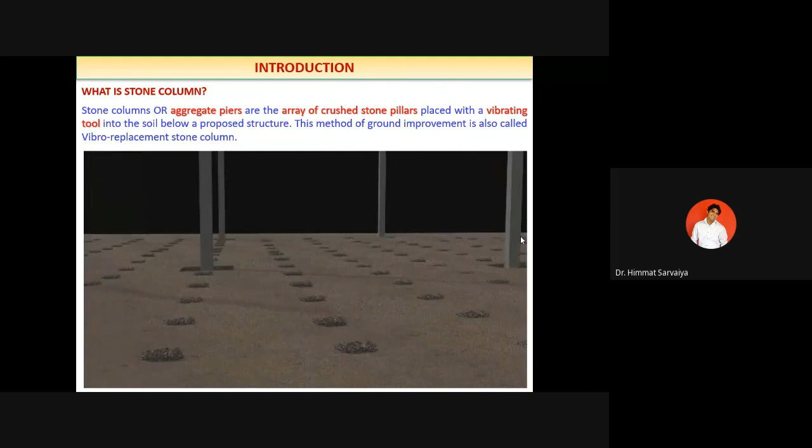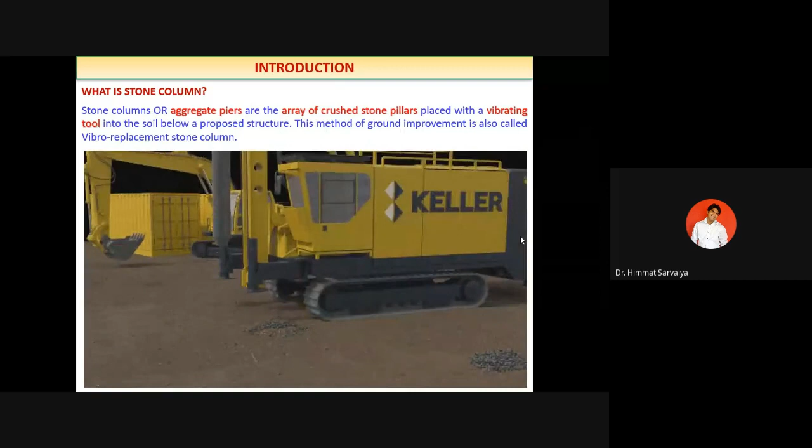So talking about this technique, basic overview, as you see in the graphical presentation, a stone column is an aggregate pier. Aggregate means whatever we use in reinforcement work, that is aggregate of 20 mm to 40 mm size. So a stone column is an aggregate pier or array of crushed stone pillars placed with vibratory tools. As you can see in this picture, the aggregate is placed with the vibrating tool below the soil surface.

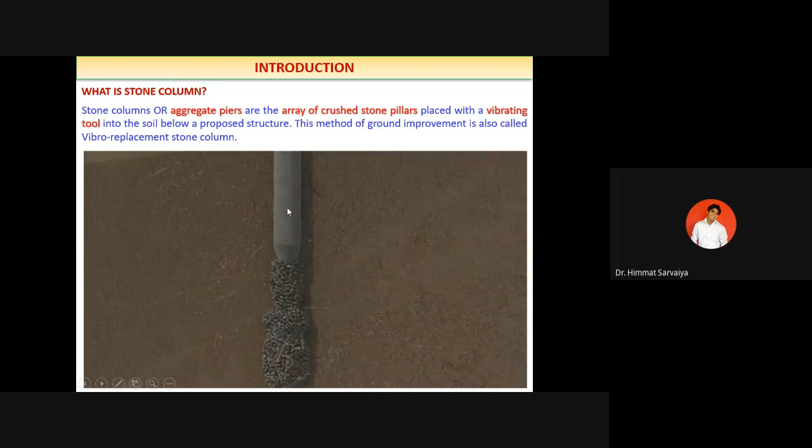This method is also called ground improvement by vibro replacement stone column. Vibro is this instrument attached here; this vibratory probe is called the vibro. So this technique is very useful for certain civil engineering structures for rapid construction work. We will see later on some of the case studies where this technique can be applied. Okay.

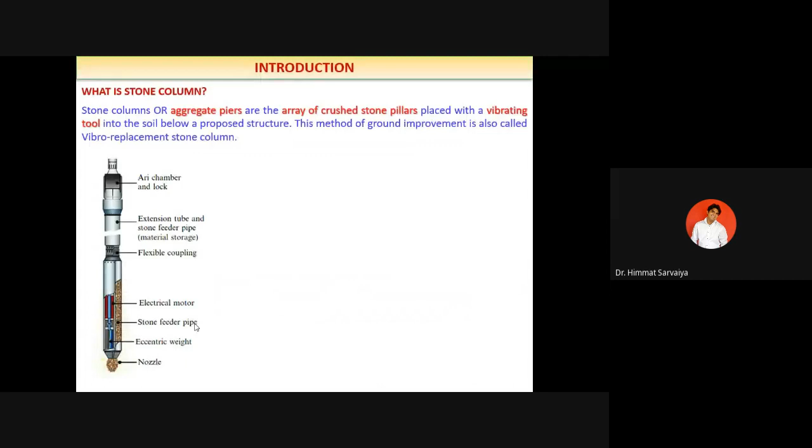As this technique is an aggregate pier, we have to put stone aggregate inside the ground. This can be achieved by certain means that we will discuss, but here you can see the step-by-step procedure. How can we construct a stone column at site?

First, the graphical representation. Here you can see a vibratory probe, called a vibro. There are certain types of probe available in the market, but here in the picture you can see the aggregate also transfers from top to bottom through the vibro probe. There are certain holes through which you can transfer material, aggregate as well as water. You can also transfer it by pressurized means.

So the first step for creating a stone column is to create a bore hole, by means of this vibratory probe or some other means. We will explain in the next slide how you can prepare the bore for this stone column. So the first step is to create a bore hole. Then the second step is to transmit or feed the aggregate.

So there are certain methods, whether you feed the aggregate at the bottom of the vibrofloat or from the top of the vibrofloat. We can see the different methods later on. But this is the technique: first you create the bore, then feed the aggregate, and then compact the aggregate by the vibrofloat, just lifting the vibrofloat and impacting that aggregate so that compaction can happen, and then the finishing layer.

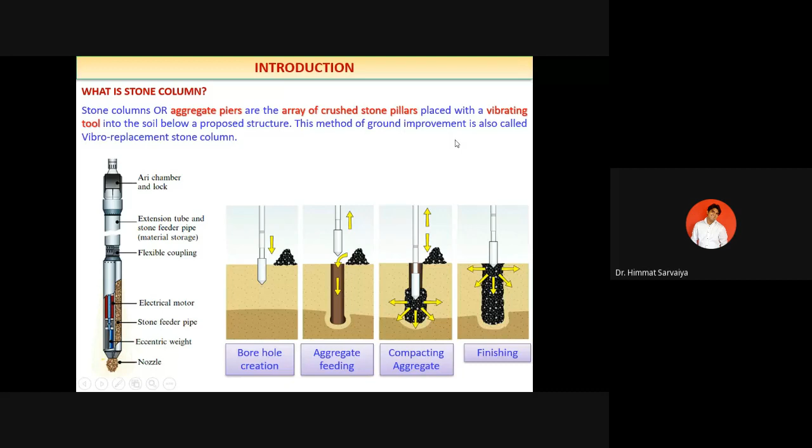Right, this is the basic technique. This is the bottom feed technique. We will see what the types of technique are later on, but this is the basic technique by which we can create the aggregate pier or stone column at site. There are huge instruments and accessories available with Keller and other companies that we will discuss later.

For preparing a stone column, we need to excavate, we need to create a bore at site. That bore we can create by two means. First, by injecting water into the ground, turning the soil into slurry and flushing it out from the hole. That means a vibratory probe having a water jet at the bottom; we have to vibrate the vibrofloat, meanwhile allowing the water jet to loosen the soil. Whatever soil is loosened will come out at the top.

It is made by the Keller Company. The vibrofloat technique was made by the Keller Company in 1930. Since then, for almost 80 years, we have been using this technique, in India also. This company is working in India, creating very massive structures, which we'll discuss in case studies also. So here you can see actual pictures of the vibrofloat.

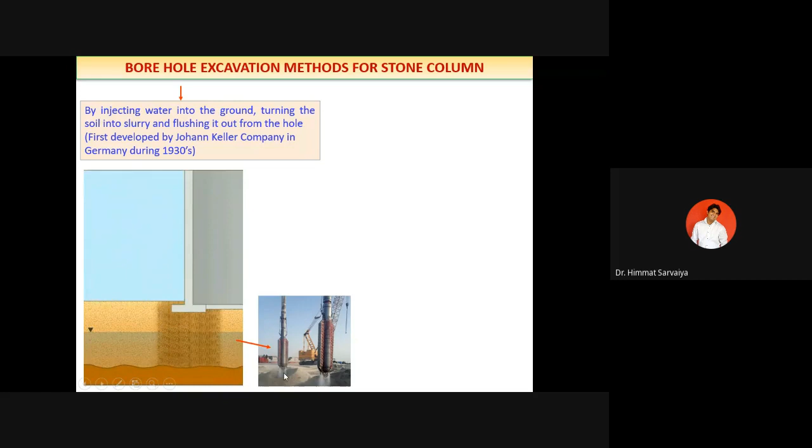We have to create the boreholes at different spacing. What spacing we should maintain, we'll discuss. But here you can see two vibrofloats excavating the bore. Here you can see the jet at the bottom. The jet will help to loosen the ground. Different techniques are used for different types of soil, which we'll discuss, but here the specific type of soil is clay or silt. So for clay and silty soil you can use the vibrofloat.

Another method for creating a borehole is by drilling a hole into the ground with drilling accessories. In that technique, we first create a borehole by drilling accessories and then feed the aggregate. So both ways we can create the stone column and rest our structural load, the civil engineering structure, over this soil. The basic principle is to increase the density of the soil and to increase the permeability capacity, so that liquefaction or other parameters damaging our structure can be neglected.

So talking about these two techniques, borehole creation by vibrofloat and by the auger. There are different types of auger that you are already aware of. With any auger, mechanical or manual, you can create a borehole, then feed the stone into the ground up to the required depth. So we can create the borehole likewise.

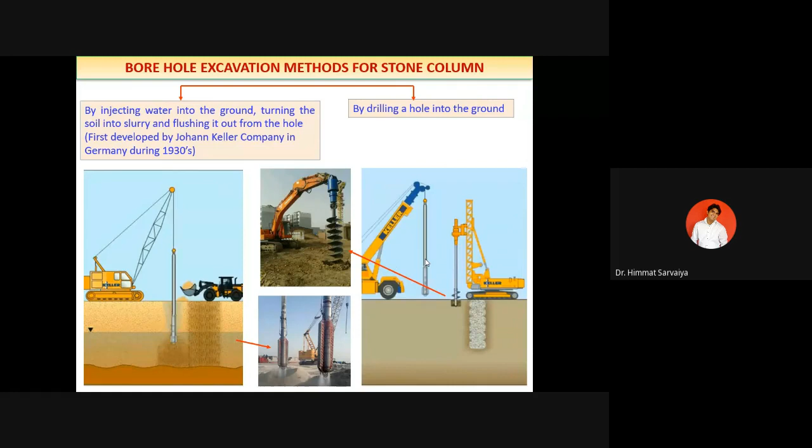So the basic principle of vibro compaction stone column is to increase the density of the ground by entering some non-cohesive material. Non-cohesive material is very good in the bearing capacity aspect. That material is aggregate, gravel or stone, crushed stone, which we can add to the borehole and compact. So ultimately the capacity of our ground will increase by increasing the density of the soil.

So with the vibratory probe, what happens? The ground will shake. Whatever area surrounds the vibrofloat is shaken, so repacking of soil particles will happen. The permeability coefficient will reduce, and meanwhile density also increases for equal volume. This is the basic principle: we create a borehole, increasing the density of soil, so the bearing capacity is increased. How much bearing capacity increases, we'll see from later research papers.

So what happens by creating such a stone column? You can increase bearing capacity, increase density, decrease settlement, provide lateral stability, increase resistance to liquefaction. These are the advantages we will discuss later on, how the bearing capacity of soil is increased.

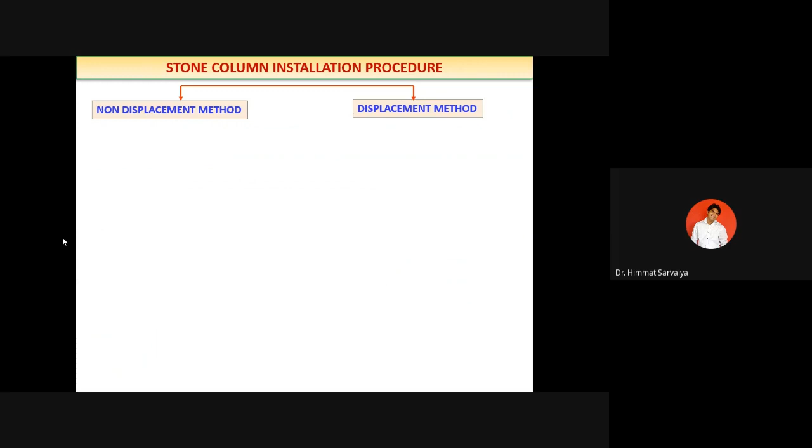Now let's talk about the different methodology used in the field, how we can create the stone column. There are two main categories: non-displacement method and displacement method. In the non-displacement method, we have to create a borehole, then feed the aggregate and then compact. Here soil is not displaced, that means we create the borehole, the soil is removed from the borehole, then we feed the aggregate. So this is called the non-displacement method.

It is also called bored rammed. Bored rammed means we create a bore, feed aggregate and ram the aggregate, enlarging the area, so the bearing capacity will increase. This is the non-displacement method.

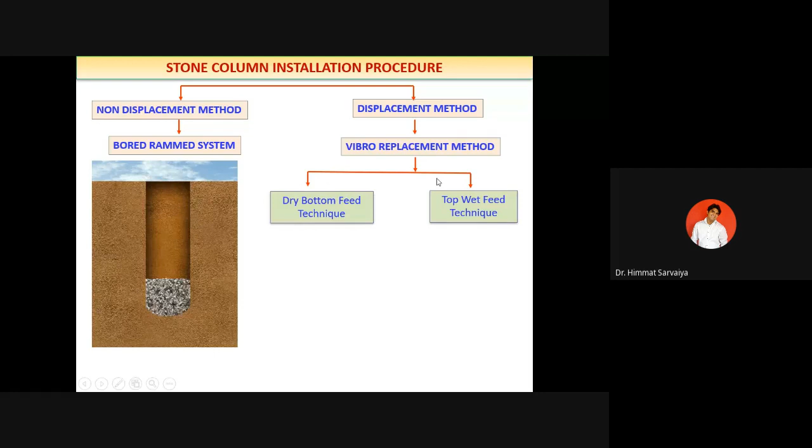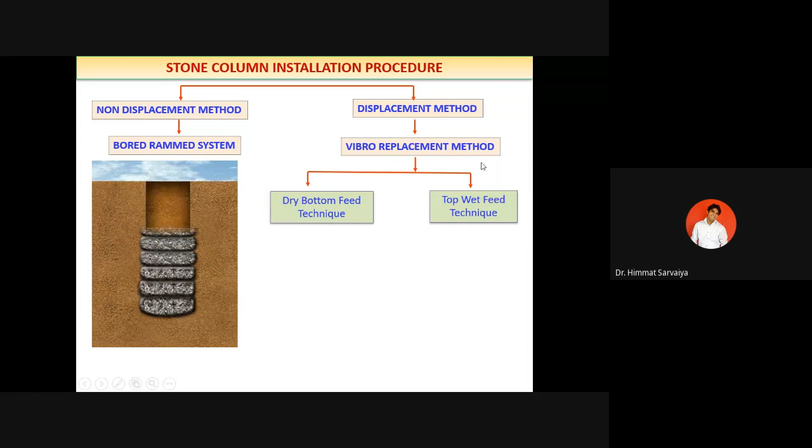The other method is the displacement method, also called the Vibro replacement method. In that there are two categories: dry bottom feed technique and top wet feed technique. What these techniques mean, we will discuss in the next slide. In Vibro replacement, there are two techniques: dry bottom feed and top wet feed. What is dry bottom feed and top wet feed?

Here you can see the picture: top wet feed system. That means we are allowing aggregate from the top of the surface. Here you can see the vibratory probe creating the borehole, and we are allowing aggregate from the top. How does the aggregate travel to the bottom? By the vibratory effect, as well as gravity action, as well as settling property.

Because this vibroprobe has a water jet at the bottom, and some vibrofloats also have water jets surrounding the vibrofloat, creating the borehole is much easier with the vibrofloat. Then we feed the aggregate from the top of the surface. This is how we create the stone column. So this is called top wet feed.

Why top wet feed? Top means we are allowing aggregate to reach the bottom from the top. We are feeding aggregate from the top. Water jetting helps that aggregate reach the required depth by vibratory action. So for a clean stone column, the clay or cohesive material will wash out at the top during the vibrofloat borehole creation.

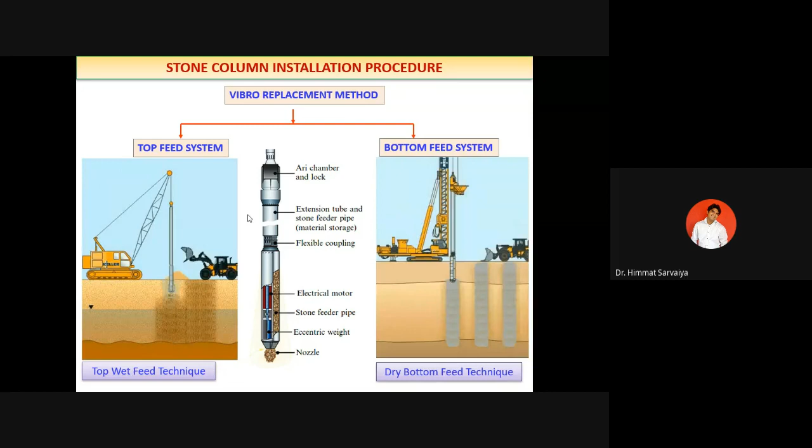So this technique nowadays is an automatic technique. You can measure the depth of the stone column or the diameter of the stone column or the density of the material, right? Each and every parameter you can measure inside the truck by an automatic measuring system. Here you can see, right? It is attached inside the cabin.

Whatever depth you achieve, what the density is, what improvement is achieved, what volume of aggregate is fed till now, all those dynamic parameters you can measure from inside the truck. So it is a very rapid technique. All parameters are measured, even the bearing capacity, how much the ground is improved, that you can also measure inside the cabin dynamically, right? So this technique is very versatile.

Now in foreign countries it is also used. In India also, Keller company is very aggressive, working on large projects, government projects and semi-government projects. Keller is used for ground improvement techniques, right?

Now let's talk about the factors influencing the design of stone columns. What are the diameter, the size, which factors are affecting the stone column technique, we can discuss: soil type. First of all, soil type is a very important parameter in constructing stone columns.

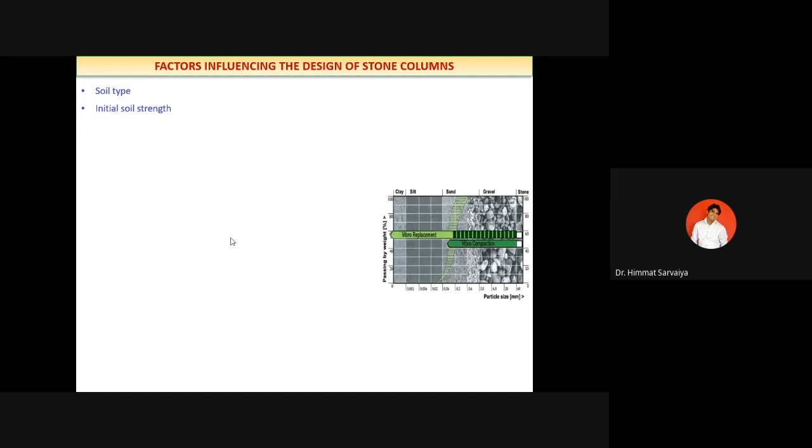Initial soil strength: as we discussed, this technique is highly dependent on soil parameters. With sensitivity more than 4, we cannot treat even with the vibro replacement stone column technique, right? So this is a limitation. But such limitations we can overcome. How we can use the stone column technique even though sensitivity is more than 4, we will learn in a later slide.

Probe spacing and pattern. Vibro stone columns are always constructed in groups, right? Like a pile group, as you have learned already. Vibro compaction, vibro replacement stone columns are always created in groups. Say for example, if we construct a 10 by 10 meter building, then we construct almost 100 stone columns at different spacing. What spacing and what diameter we should maintain, we will learn in design parameters.

But here we are discussing which parameters influence the design of stone columns. First we saw soil type, then initial soil strength. If the sensitivity is more than 4, then we cannot treat. Then probe spacing and pattern, vibroflot spacing.

Here you can see the dotted area is the stone column area we created, but when we insert the stone column, its influence extends up to the surrounding circumference, right? So that influence is around the stone column diameter. That diameter of influence around the stone column is called the equivalent diameter. What equivalent diameter is, and what diameter we should keep, we will learn later on.

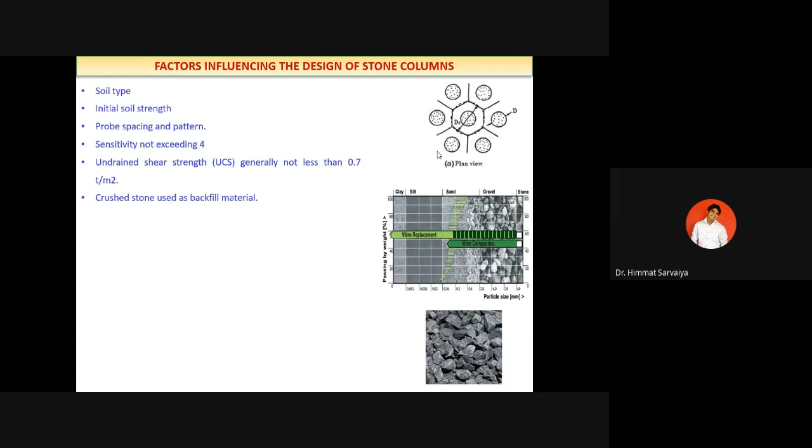Crushed stone should be used. Whatever replacement material we are using should be crushed stone, having no clay material contacted, so this material is ideal for stone column. This material should be chemically inert, meaning chemically not active aggregate should be fit.

Size should be maintained. Aggregate size is highly dependent on the successful working of stone column. In field, generally 20 to 40, up to 50 diameter stone is used. One basic criteria: stone column aggregate should not be too large and should not be too minimum, so that the function of creating the stone column method is easy. If more large dimension aggregate is used, there may be more cavities and you cannot compact such aggregate.

There is certain limitation of diameter or size of the backfill material. Well graded aggregate of 75 to 2 size may be used. Well graded crushed stone aggregate is better for the stone column technique.

Now move on to the basic design parameters. First, stone column diameter - which size of stone column we should create at site. This is the first design parameter: generally in field, 2 to 4 feet of diameter is used for vibro replacement technique, while in rammed stone column we can create up to 1.5 to 2.5 feet diameter.

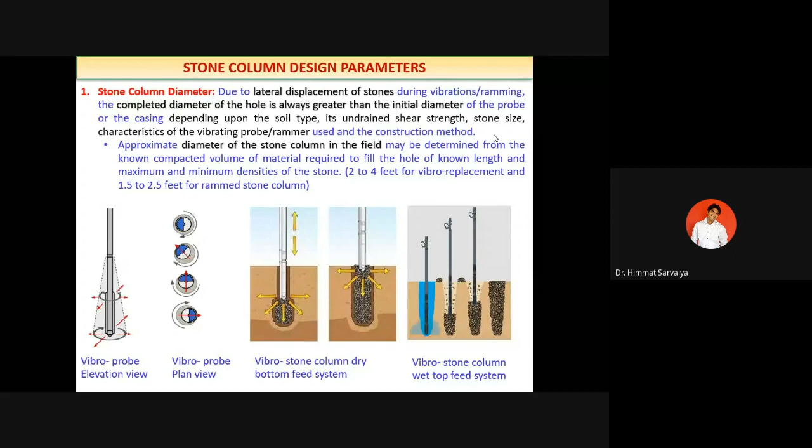Second design parameter you should consider is spacing - which spacing is ideal for stone column. Spacing is directly related to the cost of construction, as well as the improvement of the stone column technique. More spacing means less bearing capacity; closely spaced means more bearing capacity. But you cannot place stone columns one by one, near to near.

There is certain spacing required, because once you insert the stone column, there is an influence area surrounding it. If you insert a stone column near about the influence area, there are difficulties to create the borehole as well as to feed the stone column. So there is a certain spacing you should mention - that is the equivalent diameter. Up to equivalent diameter, your stone column must be spaced.

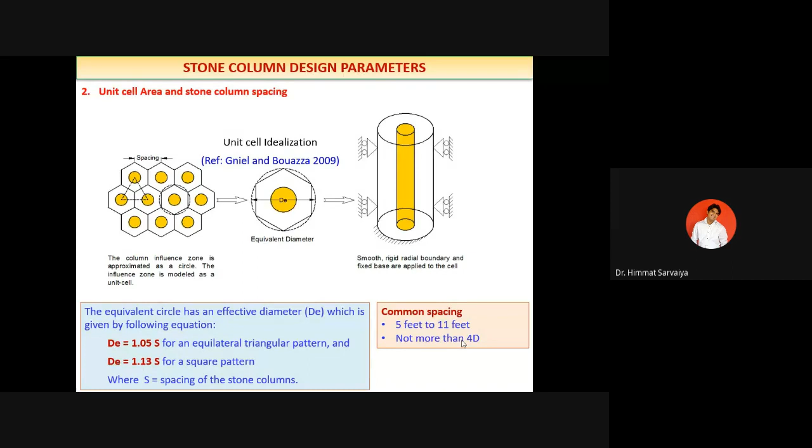This is the basic parameter we should keep in mind while constructing stone column at field. Stone column pattern - as we discussed in previous slide, stone column can be created at the site with different patterns. You can use triangular orientation, square orientation, hexagonal orientation. Depending on the orientation, you can find equivalent diameter, which you can calculate from this equation.

So which technique is more useful? If the equivalent diameter d is very less compared to these three techniques, that technique will give you the best possible compaction of ground, best improvement. This d will be very minimum in triangular shape, so triangular orientation is the best possible solution for ground improvement.

The spacing, diameter, height of stone column depends on the availability of soil layers at site. Before constructing stone column, there are certain tests, certain methodology used to find which soil is available at which depth. So this technique we have to use before constructing the stone column, to find the bearing capacity of available soil without improvement. At each and every depth, which type of soil and its bearing capacity, you have to measure before stone column is introduced.

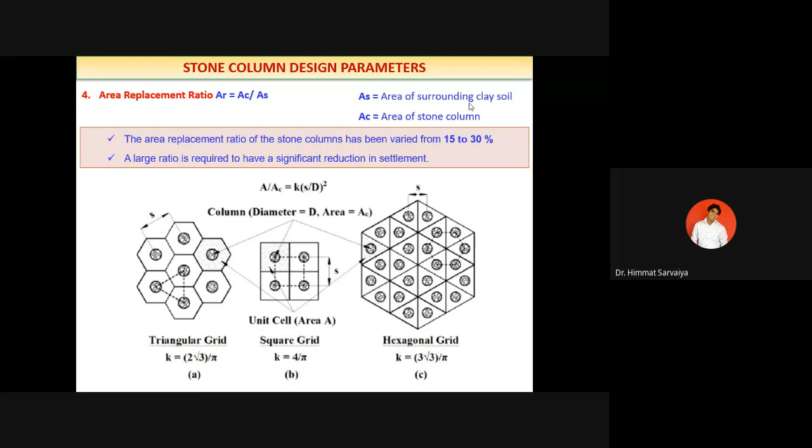So area replacement ratio should be 15 to 30%. A large ratio is required to have significant reduction in settlement - 30% is enough. Above 30% is good, but there may be an effect on cost of the project, because the spacing will reduce and the depth, compaction effort will increase. So area replacement of 15 to 30% is ideal.

Types of soil suitability for stone column - that slide we have already seen previously. Vibro replacement will be used up to the clay soil; beyond sensitivity 4, we cannot use even vibro replacement technique. There is a certain improved technique available in field that we'll discuss, but there are certain limitations. So this technique is ideal in the case of silt, sand, and gravel - non-cohesive material, which gives you effective confinement surrounding the stone column, which is ideal.

But if there is organic matter or clay material, if you construct the stone column in that, what happens? Whatever load comes, the aggregate we feed gets displaced into the surrounding soil, so your stone column may fail. So the type of soil highly recommended for stone column is silt, sand, gravel.

Even though this stone column technique is highly recommended, if not taken proper care, this technique may fail, especially if we apply more loads. Stone column may fail in three different failure mechanisms.

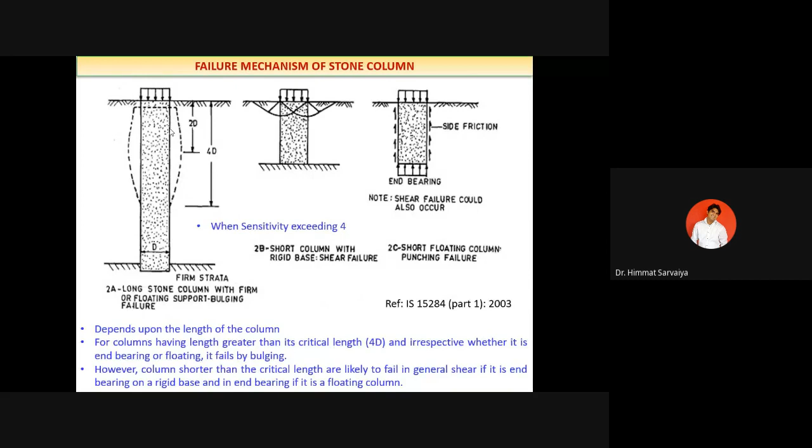This will be a very useful technique. Many researchers have found that bulging occurs up to 2 times diameter, with maximum bulging at 2 times diameter, leading up to 4 times diameter. Basack, Indraratna, 2015 - all these references I have mentioned in my reference section, you can see more detail on the failure study of stone columns there.

However, in my PhD research, I also found out using Plaxis software how much the stone column is deformed at which depth. But from many researchers, it is concluded that stone column bulges up to a maximum of 2 times diameter. There is a certain technique to prevent this bulging by providing geosynthetic encasement - we will discuss that technique later. But here, a stone column may fail if there is less confinement. So this is the failure of stone column; how you can overcome it we'll learn in a later slide.

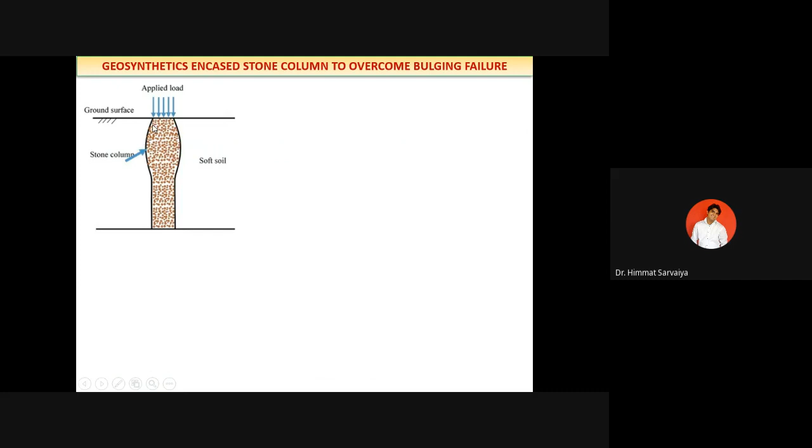You see, once you apply load, a stone column is expanding here, but by using geosynthetic material... Geosynthetic is one type of fabric which is non-corroded, right? No weathering effect will happen on the geosynthetic material. Even though steel or any other material will be corroded, geosynthetic material will not corrode. So this material is very helpful.

How it is helpful? During construction of stone column, whatever borehole we created, you simply put that geosynthetic material into the borehole and then feed with stone aggregate. So this helps to reduce the bulging. The additional confinement that the soft soil is not providing, you can make up for by providing geosynthetic material, right? So geosynthetic will help you to provide additional confinement, so that whatever load is coming from the top will travel up to the greater depth, right?

So this way, the geosynthetic material will help you to transmit the load up to the greater depth and to reduce the bulging of stone column. Here you can see bulging can be reduced by applying geosynthetic material. Many case studies we will study later on: which technique, at which places this technique is used, and which are the benefits, right?

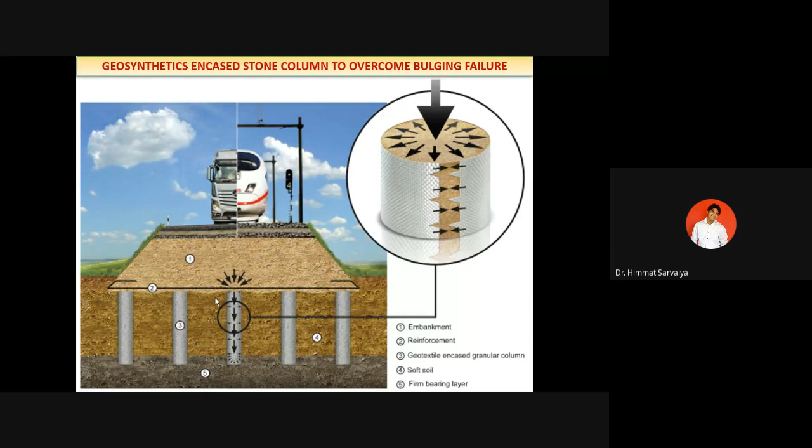So in the railway project, in the embankment, the stone column constructed here is a geosynthetic encased stone column. So the soft soil, the yellow soil here you can see, the load coming over the stone column cannot bulge into the soft soil. So whatever load is coming is transmitted directly up to the hard soil. So it will help to transmit your vertical load up to the hard strata, and the stone is not bulging, because the geosynthetic is providing extra confinement. So the bulging of stone column here is reduced by using geosynthetic material.

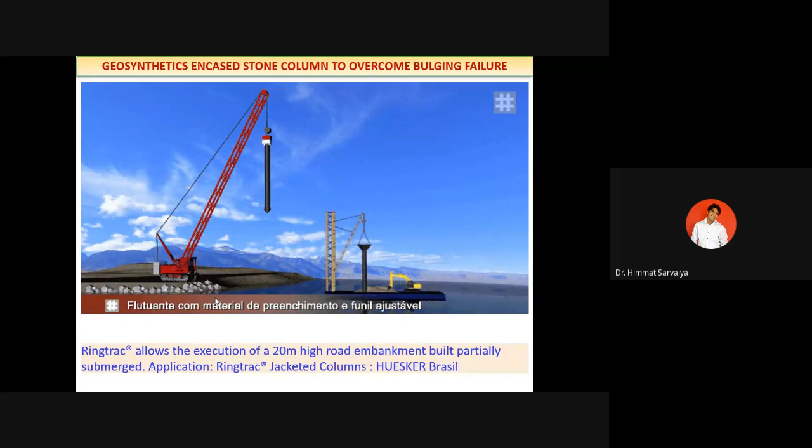Here one of the case studies is available, how we can construct the geosynthetic encased stone column. This case study is from Brazil. The Huesker company, like Keller company, is also working in Brazil, and it shows how we can create a geosynthetic encased stone column. So first you have to create the borehole, then insert the geosynthetic material, Ringtrac it is named, then feed the aggregate inside the hole, and meanwhile you remove the casing pipe.

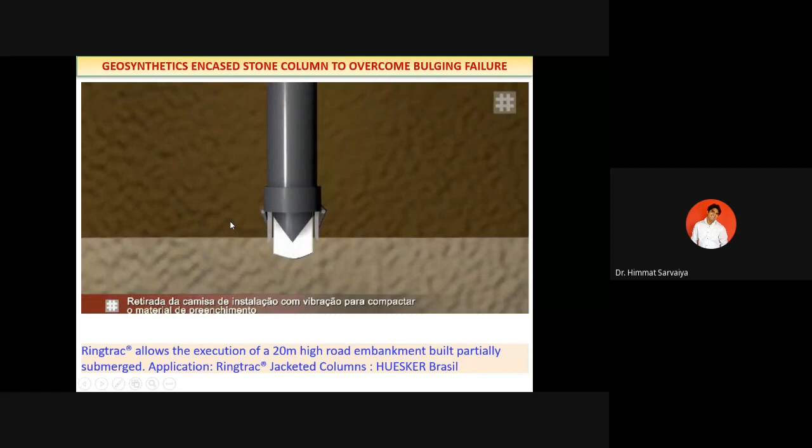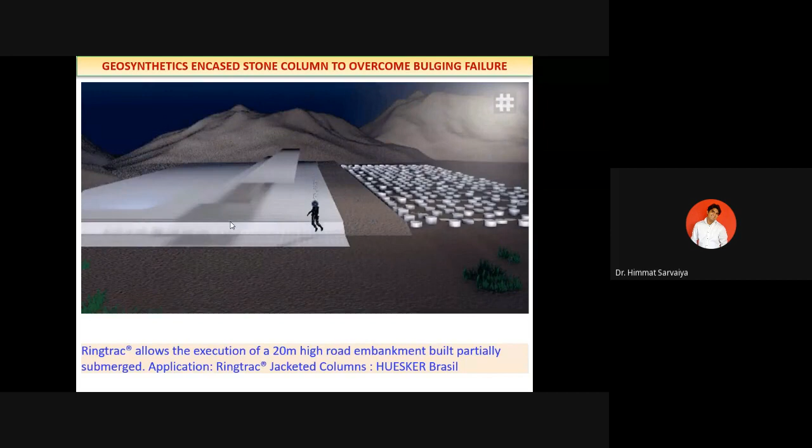Say for example, once you feed the aggregate up to 2 meter depth, the casing pipe may be lifted up by 1 meter. Further adding material, lifting the pipe, further adding material, lifting the pipe. So this technique, the geosynthetic encased stone column, is a very useful technique in the case of underground soil stabilization. Here you can see a vibratory probe is inserted into the ground up to the required depth.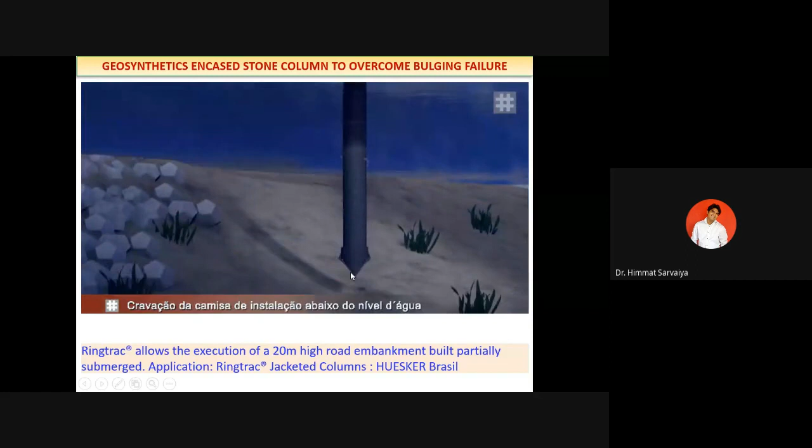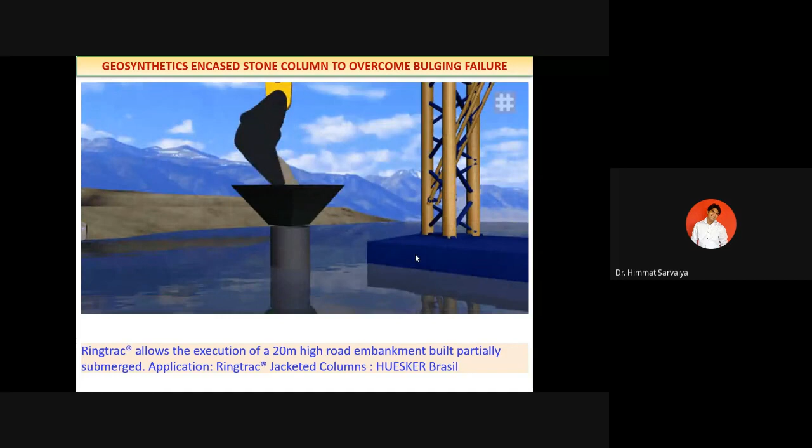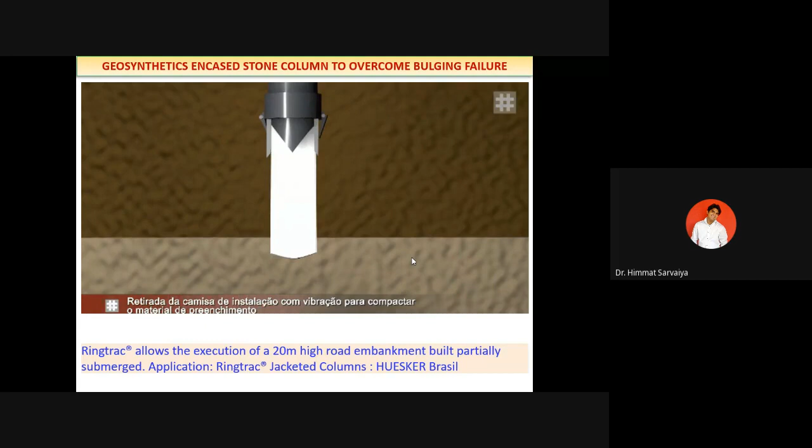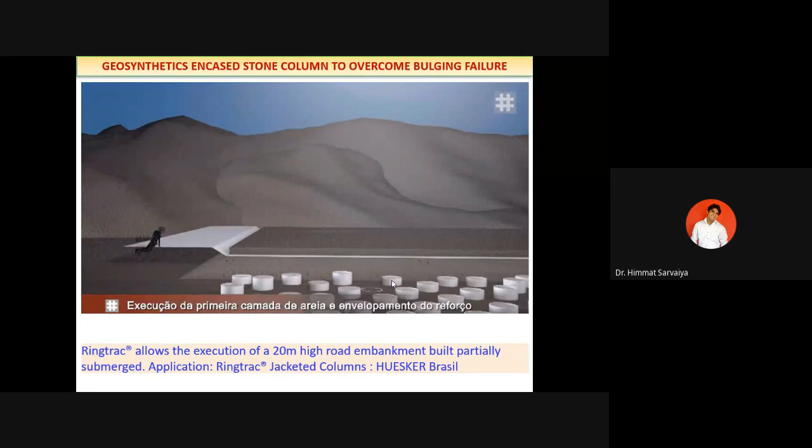Then we feed the geosynthetic material inside the borehole. Geosynthetic material we are putting inside the hole. Once you have provided geosynthetic, you have to backfill with gravel or crushed aggregate. Over the constructed stone columns, later on we can provide the base at the top by creating the aggregate layer and geosynthetic layer, and then over that structure you can put your embankment or whatever civil engineering structure. So your settlement compared to non-treated soil will be reduced in the case of geosynthetic encased stone column.

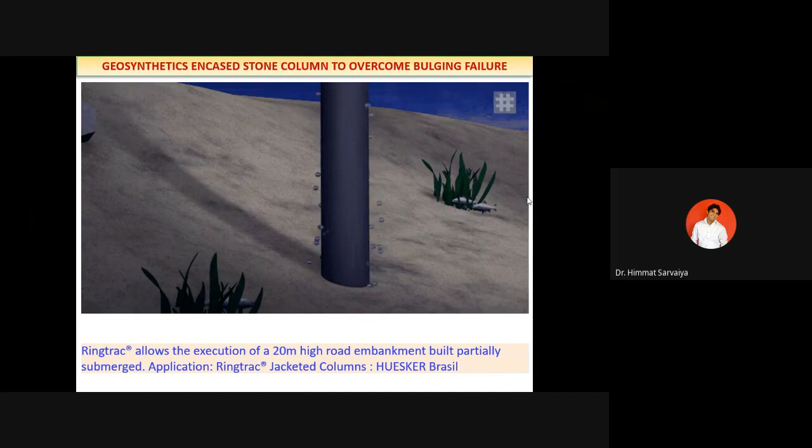So this is the geosynthetic encased stone column, and how we can create a geosynthetic encased stone column in the field. Over the ordinary stone column, the geosynthetic stone column will help reduce bulging. It carries more load compared to the normal or uncased stone column.

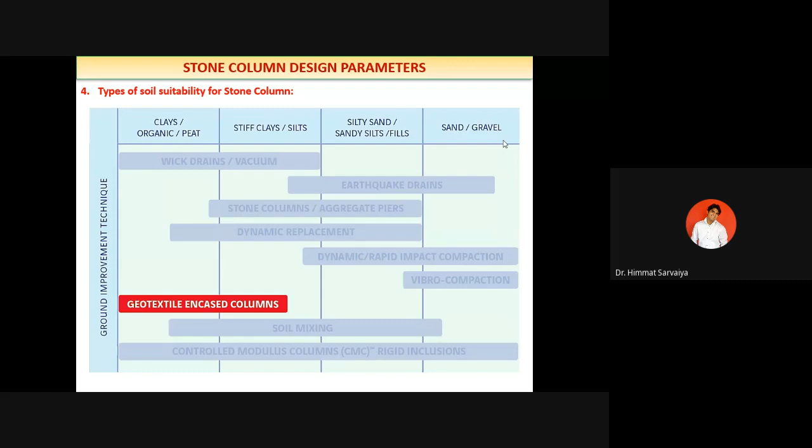So regarding limitations which happen in ordinary stone column creation, the geotextile encased stone column we can use beyond the sensitivity for organic matter. If there is organic matter or clay, you can use geotextile material, because whatever confinement is needed in the case of soft soil will be provided by geosynthetic encasement, right? So for the limitations of soft soil, we can provide additional confinement by providing geosynthetic encasement, right? So this technique, the geosynthetic encased stone column, is very helpful.

Certain techniques also use geosynthetic material, fabric, or a casing of geosynthetic. Some research work is also going on in the laboratory, where you provide such casing so that extra confinement can be created. So in whatever soft soil your stone column aggregate penetrates into the ground, that limitation of the ordinary stone column you can remove by providing extra confinement by means of a geosynthetic encased stone column.

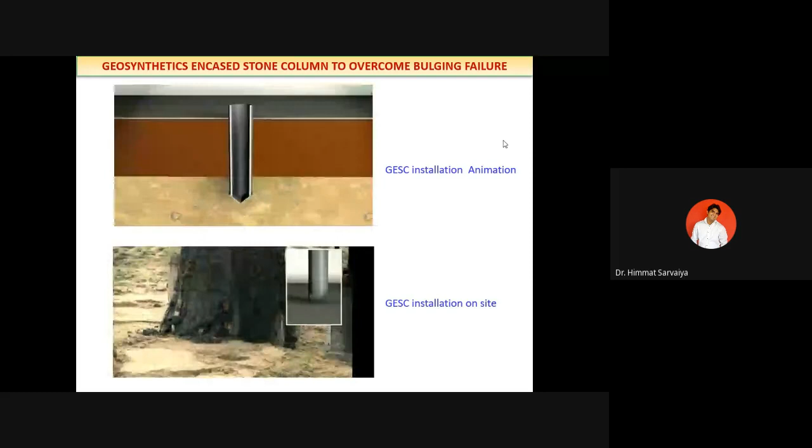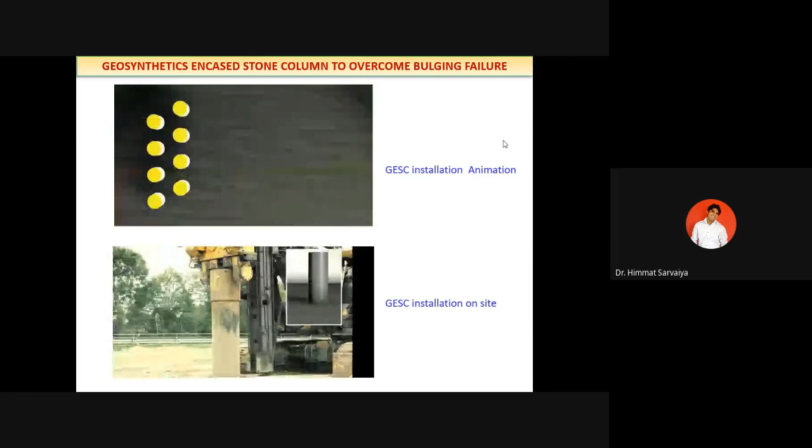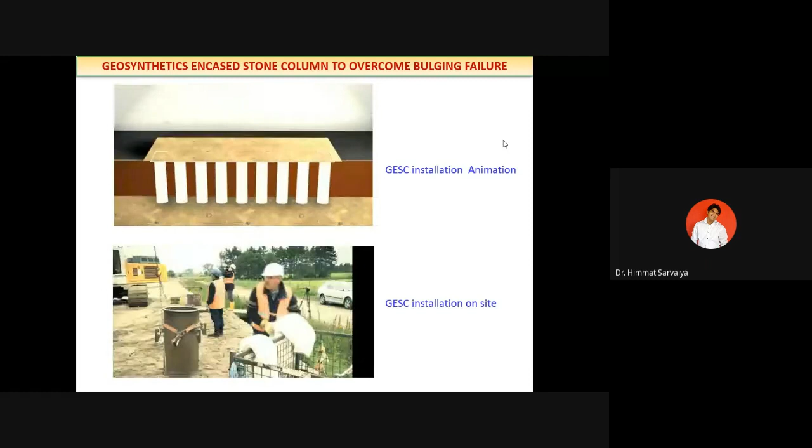You can see in the top slide the procedure of the geosynthetic encased stone column. Here at the bottom you can see the actual method for the geosynthetic encased stone column. This technique is widely used in Germany as well as in the UK. HUESKER, Keller, are some of the few very big companies worldwide providing geotechnical solutions. These companies have large equipment which can create your ground improvement by stone column very quickly, right?

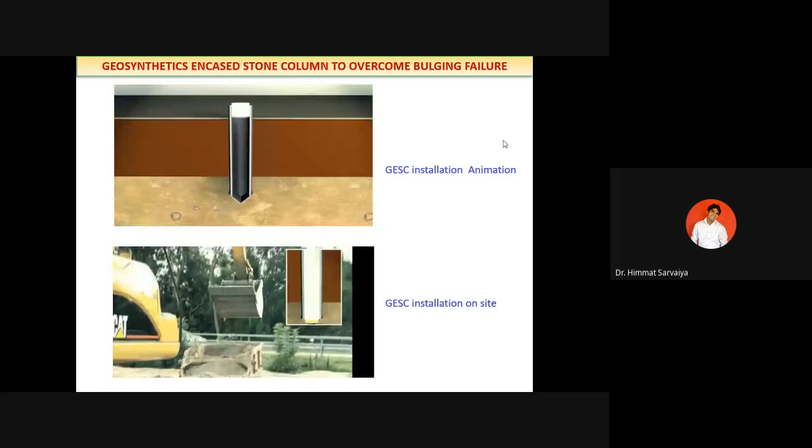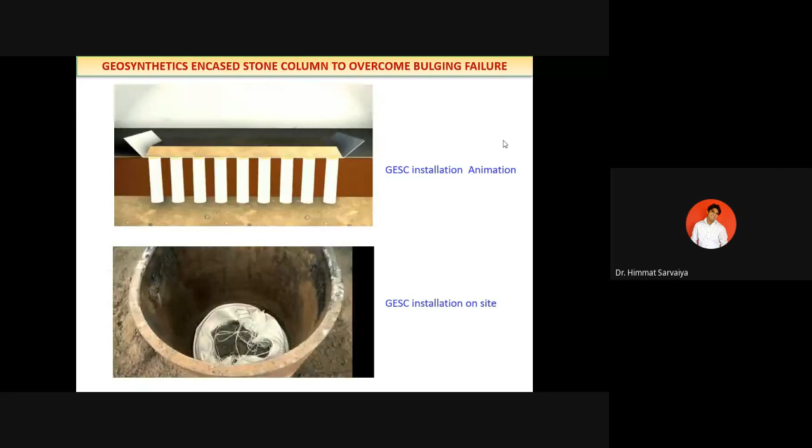So this technique, compared to pile foundation, will give you benefit in saving project cost, because in one day you can create a total ground improvement. While in pile foundation, you need at least 30 days. If you put your pile material, concrete material, then you have to allow it to set, allow the concrete to harden. But in the case of stone column, you can create it within 1 day. Your project will work. Your site will be neat and clean, right? So this technique is very beneficial compared to pile foundation.

So this is again a picture of the geosynthetic encased stone column. How can we create it? This is the finished geosynthetic encased stone column. And in the first slide you can see the geosynthetic material here. At the top you have this borehole, which we created with the help of augering or with the vibratory probe; a casing pipe we need to install, and then the geosynthetic material we have to install,

and at the top of the geosynthetic material we have to bind it with rubber, and then feed the aggregate at the bottom. Once the stone column is completed up to the ground surface, you have to remove the binding from this casing with geosynthetic material. So the geosynthetic encased stone column we can create.

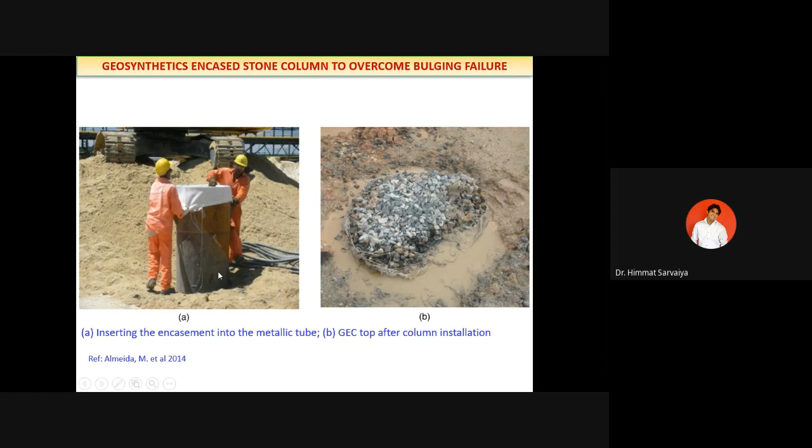So if we talk about various applications, you can use stone column for embankments, whether embankment for railway or for highway, right? So whatever ground improvement is needed, we can provide with stone column. After constructing the geosynthetic encased stone column, you have to cover the top surface with non-cohesive material and create a level surface. During stone column installation, you cannot create a level surface at the top, but by feeding non-cohesive material at the top surface, we create a sand layer at the top. So a leveling surface is required.

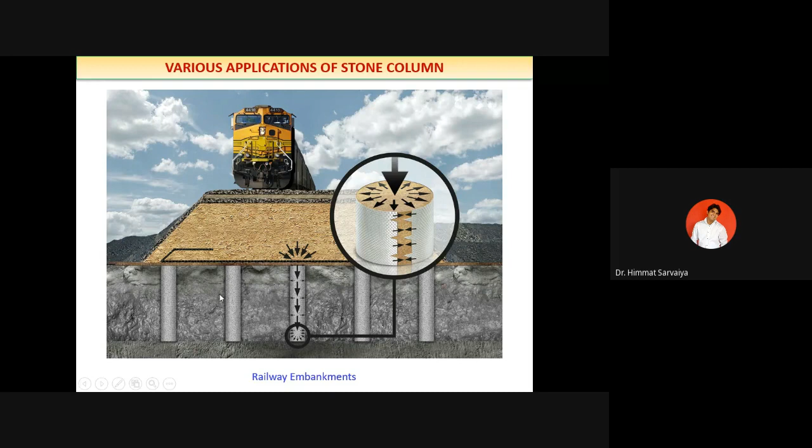After that, you can lay down the geosynthetic material at the top, and then you can lay down your embankment, so that settlement or undulation of the railway track or embankment will be very less, because you reduce your settlement here. There is hardly 5 mm settlement if you construct the stone column effectively. So constructing with stone column will give you less settlement at the site. You can use stone column even in road embankments at certain spacing and certain diameter.

You can create stone columns even at the bridge abutment, because the middle portion of the bridge is RCC, but the approaches are earthen fill approaches, right? So in such cases you can create stone columns, so your embankment will not fail, by creating stone columns at the sides of the embankment.

This stone column technique is also very useful to treat offshore structures like seashore structures. If you construct a jetty or other offshore structures, stone column ground improvement is very helpful. Otherwise, if you do not construct the stone column, what happens? For construction underwater, you create a coffer dam, which is very costly compared to the civil engineering cost. But the stone column technique will treat the ground, even offshore ground, very quickly and by effective means. Right.

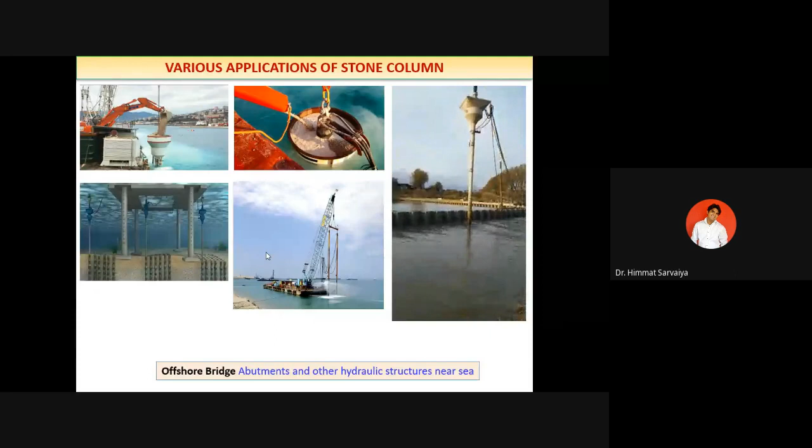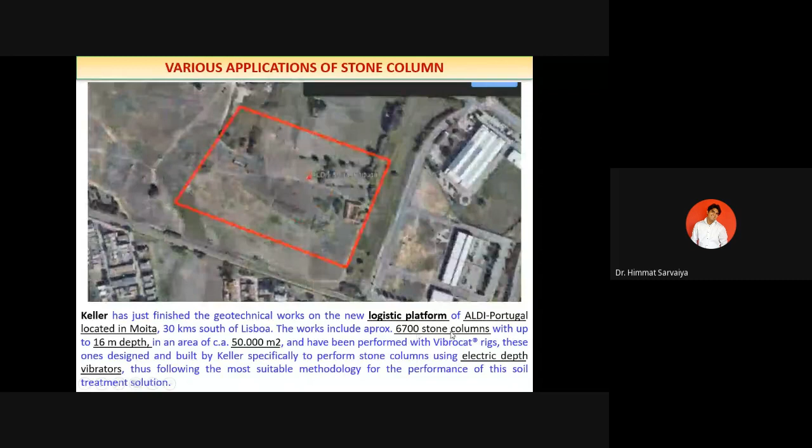So here, stone column technique is used for a logistic platform, railway platform at Moita, South Lisbon. Keller company took the project in the Portugal area. Around 6,700 stone columns were installed at specific depth, specific pattern, up to 16-meter depth. The area improved is around 50,000 square meters. So whatever the area, the stone column technique will treat it easily and very quickly.

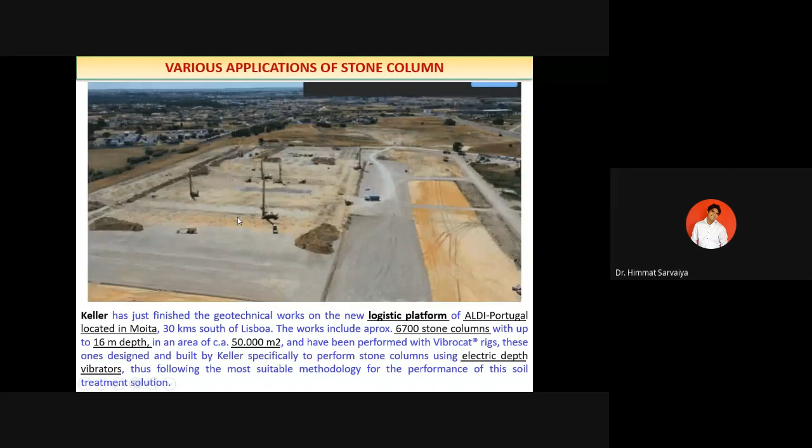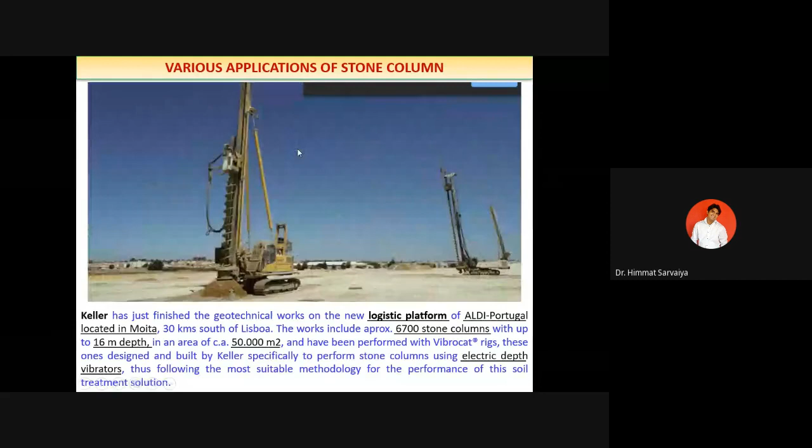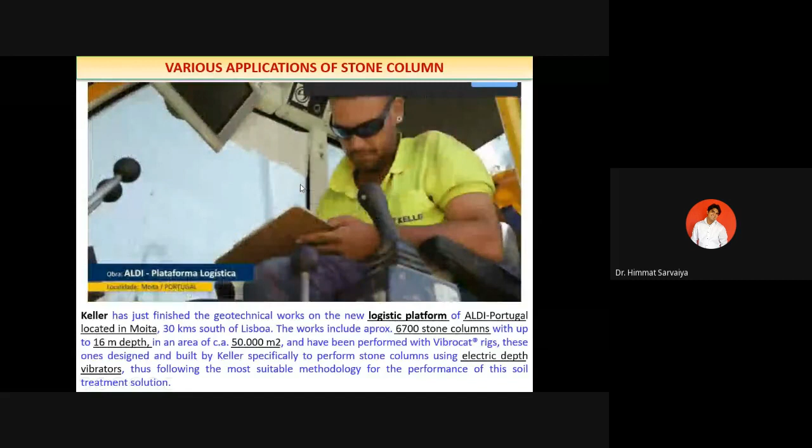So an electric depth vibrator is used by Keller, which is very effective for creating the borehole and creating the stone column. Bottom feed technique is used. Here you can see in this picture, bottom feed aggregate is feeding in the probe itself. Then we feed aggregate inside the hole and compact it. This technique is very useful. This is the case study where the stone column was effectively provided.

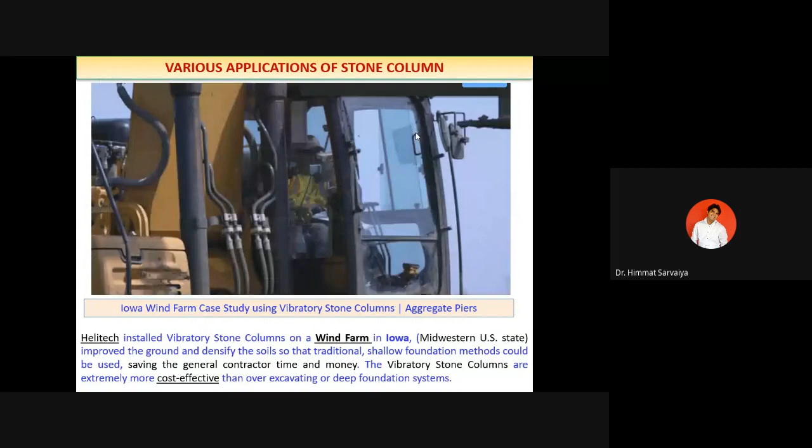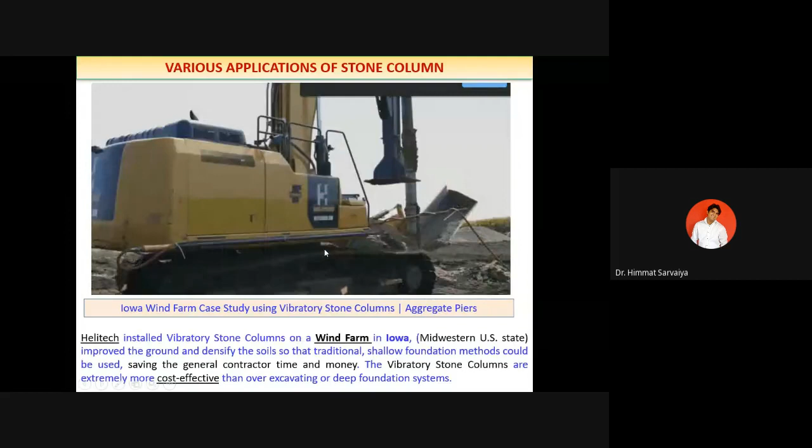Another technique for the windmill: whatever windmill we are seeing at the site, at the foundation we need to treat that soil by certain means. So stone column technique is very helpful in the case of tower-like structures, for example windmills. Here you can see in graphical pictures a foundation for a windmill created in the US state of Iowa. Helitech company took the project; aggregate piers were created for the windmill. A vibroflot, as you can see here, was used for creating the ground. Dry bottom feed technique was used.

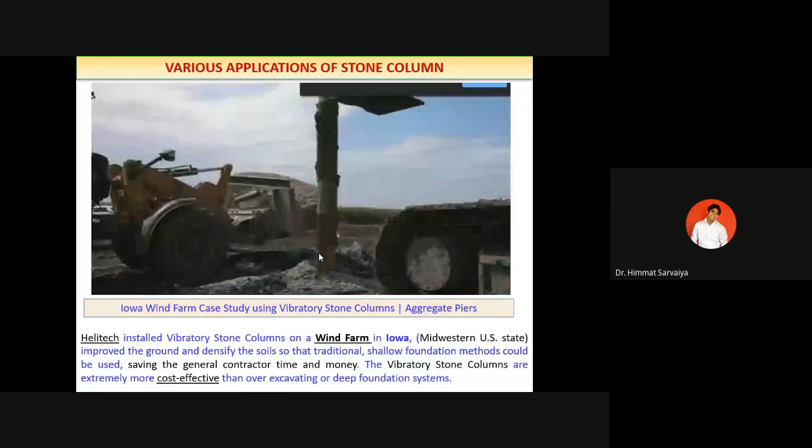It is cost effective. Plus, with this ground improvement we can create such an area of around 50,000 square meters within 1 week, right? So ultimately your project time will reduce.

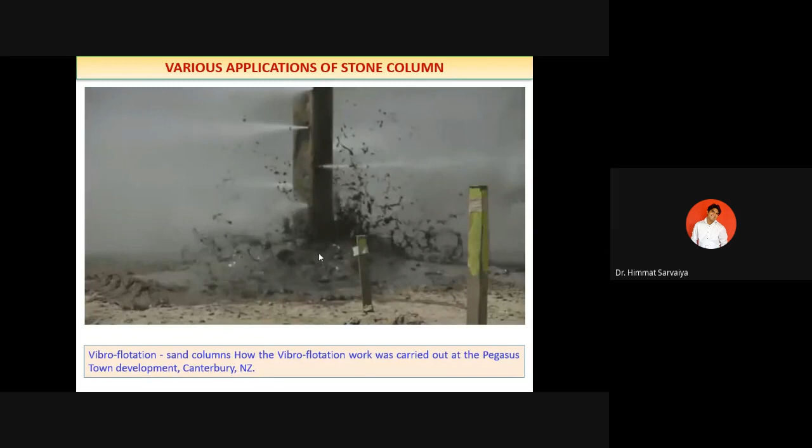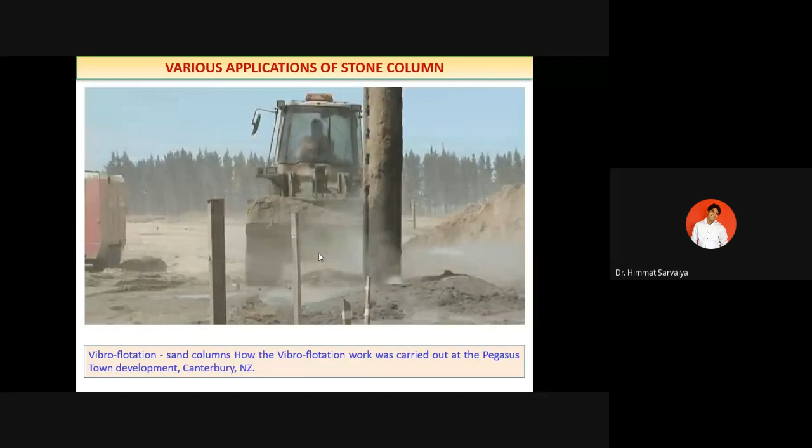This is a case study in Canterbury, New Zealand. Stone column technique was used with a vibroflot; the wet top feed technique was used by creating a borehole with a vibratory probe with water jetting. In the wet top feed technique that we learned, we apply aggregate at the top. The aggregate travels into the ground up to the required depth by means of water jetting, gravity and vibratory action.

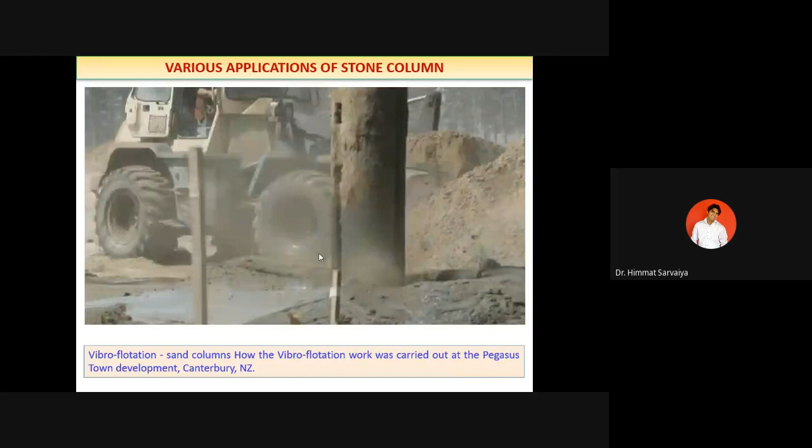So the resulting stone column ground is placed with non-cohesive material. Whatever cohesive material there is, is washed out by the vibratory probe water jetting, right? And a non-cohesive material, which is very useful for reducing settlement, is created with this vibratory action.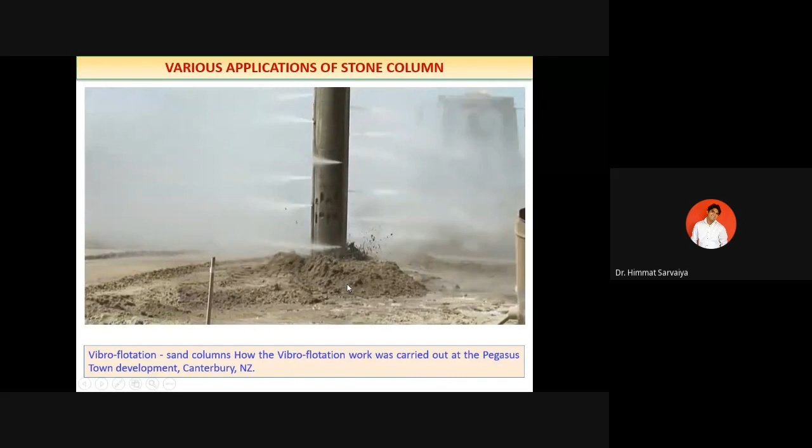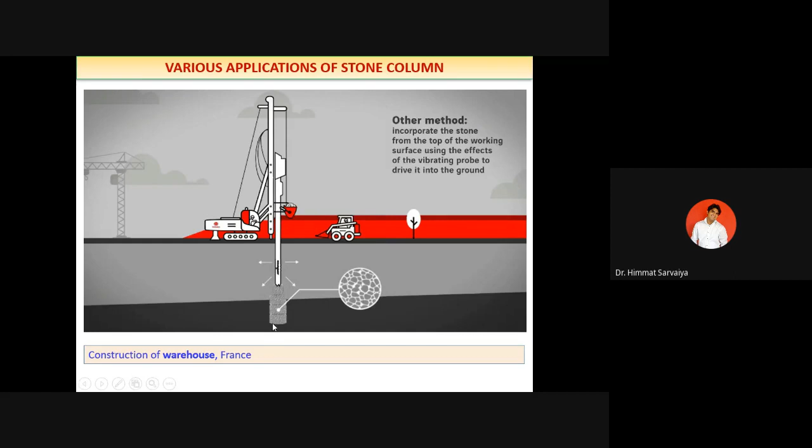Another case study is a warehouse in France. In this project, diameters of around 40 to 120 centimeters were used. The technique used was a vibratory probe with dry bottom feed. Here you can see the aggregate fed into the hole up to the required depth and compacted by the vibratory hammer. In such a way you can put your structure. This is the actual field where this stone column technique was constructed.

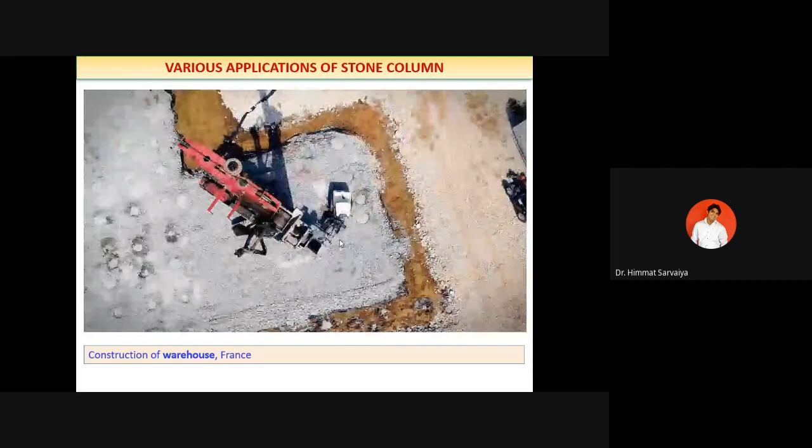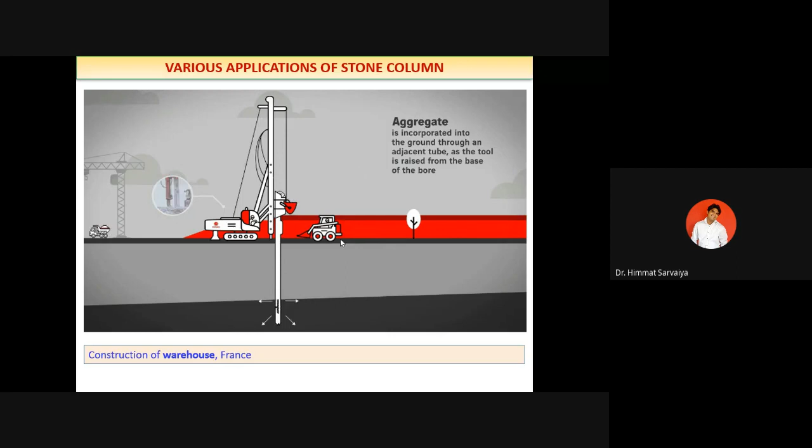What are the advantages? The time of the project is reduced, settlement is reduced, and your site will be neat and clean, because there is no stacking of reinforcement at the site; you just need to put aggregate inside the hole, so there is a neat and clean site. Within a week, 5,000 square meters of ground can be treated very rapidly.

Another application of stone column is that you can create a stone column foundation for LNG or oil storage tanks, liquefied natural gas or crude oil tanks. In the Reliance Hazira LNG tank, a stone column foundation was prepared. There is a case study available also. With such a technique, within one day you can put your tank over the ground.

If you use a pile foundation, then what happens? You need to wait for at least 30 days. While with stone columns, you can put your structure within 1 week, or after completion of the ground improvement. That depends on how fast you can create the stone columns. If you multiply the equipment, then your cost and your time of construction are very less.

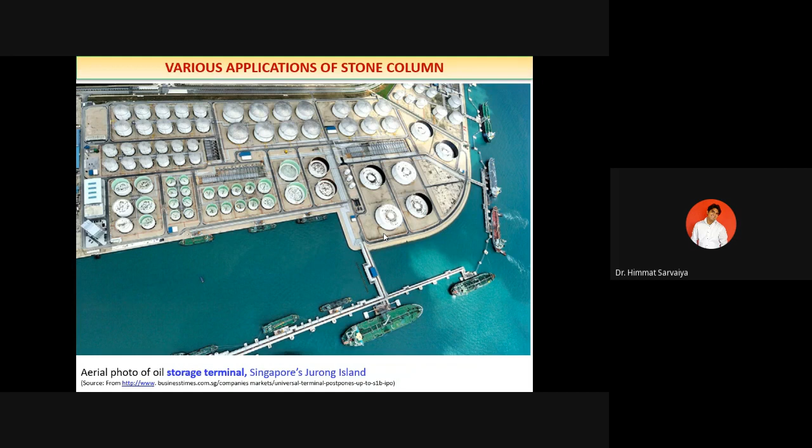This is one of the case studies, a storage terminal station on Jurong Island, Singapore. The stone column technique was used at the foundation of the oil storage tank. In the dark yellow portion, here you can see sand filled with vibro stone columns. Over that, a tank of 22.3 meter height. You can create the stone column up to 20 to 35 meters, up to the hard strata, depending on the equipment available with you at the site.

So before and after installing stone columns, you need to take certain tests. For example, here a CPT, cone penetration test, is carried out before construction. Here you can see the cone resistance is around 4 to 8 megapascal, but after installing the stone columns, the CPT value is increased to around 35 or more with depth, right? So it reveals that by installing stone columns, your ground is improved.

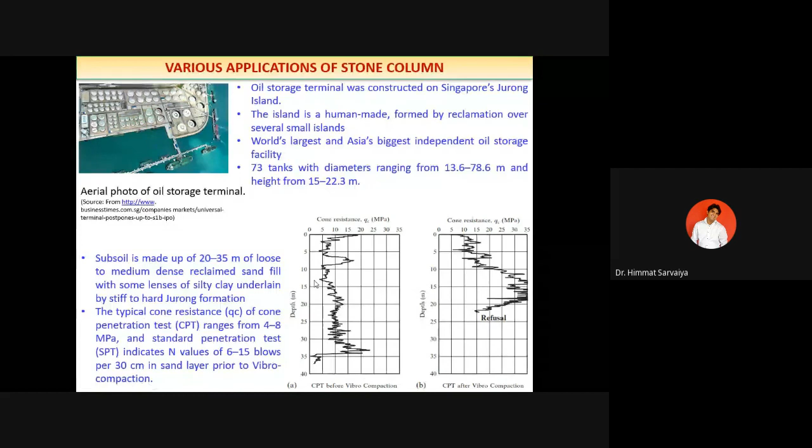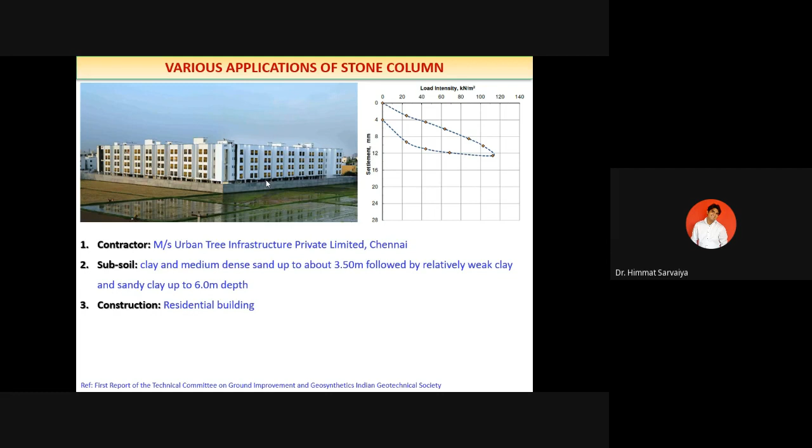Even in residential or commercial buildings, you can put the various stone columns at design spacing or design pattern, design diameter, whatever we learned previously. So these are the case studies where you can apply or do ground improvement using stone columns. So a before and after test is necessary, so that you are aware of how much improvement has taken place.

Other case studies: location in Bihar, Keller company carried out this project for a factory area. Owner, Madhepura Electric Locomotive Private Limited. Main contractor is Tata Projects. Tata Projects gave this contract for ground improvement to the Keller company for creating the hard layer soil improvement. Keller introduced the stone column technique. The engineer was CIMEC consultant.

So in this project, ground improvement was created within 1 week. So the time taken during construction is very minimal in the case of the stone column technique. Now we discuss various parameters or various research going on in the laboratory. I have created some slides, very few slides.

If you learn about the various methods or techniques, how you can do research beyond whatever technique is available in the field, even though this technique needs to be improved by creating certain research, right? If you do some research in the laboratory, then this will be very helpful for ground improvement and reducing cost. If you do some research in the laboratory, then this will be very helpful to society.

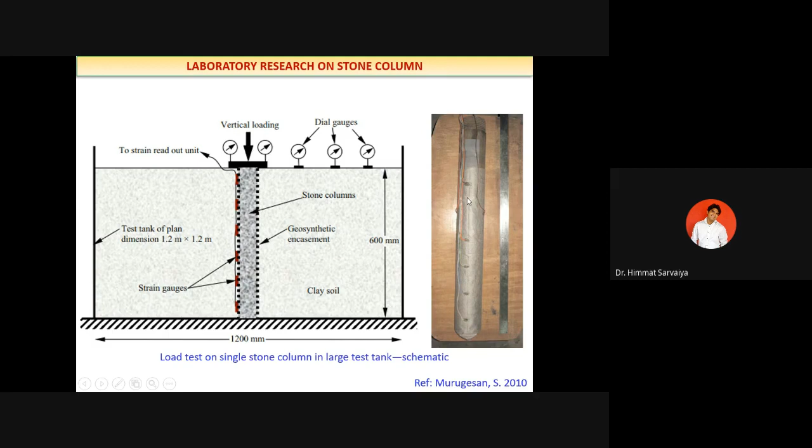And depth, according to what we have seen in the previous slide, a 600 mm depth tank is used, and a certain loading arrangement, a loading plate you have to put, and over that you apply load. So by applying load, whatever the settlement at which load, you can put that graphical presentation in your study if you are interested in this type of practical work in your master's degree. Here, this type of research work is already completed.

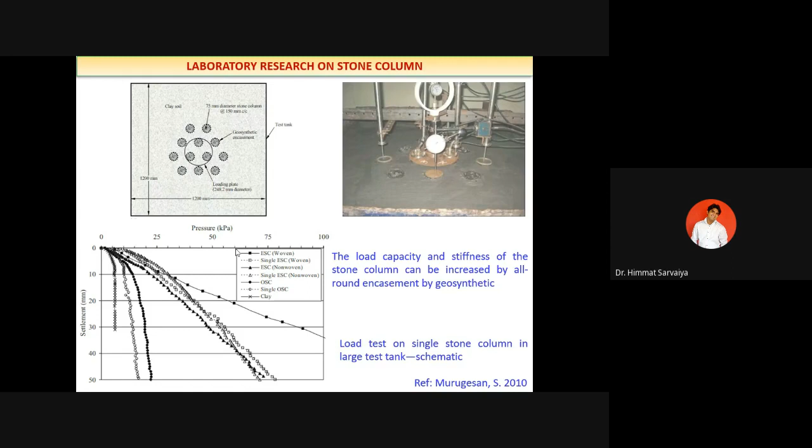You need to take some different parameters. By considering field experience, you can reduce cost, you can reduce time by providing certain arrangements, by providing certain techniques, right? So this way you can give your contribution to society by providing different research in this field, the stone column technique.

Other researchers have also created such types of laboratory arrangements, right? Loading frame and tank, created stone column, applying load. You can place different types of soil, even for the stone column, at which soil parameters are available at site, at which the technique is useful, right? Different types of soil you can treat.

But I can tell you that this soft soil creation and its management in the laboratory is very tedious. If you use silt and sand, then your job will be very easy. But if you create this tank filled with clay, then it is very tedious work, right? Treating clay is always very difficult. Playing with clay is very difficult, because silt will create the bed very easily, but creating a clay layer is very difficult. So by considering such parameters during your research work, think further about which type of soil bed you need to prepare. If you prepare a clay bed, then your job will be very hard.

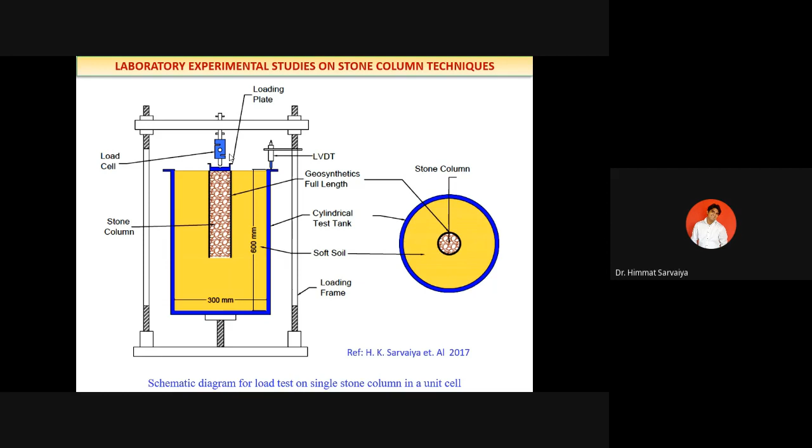This is my research work I have shown here. Loading arrangement, load cell and LVDT I have attached, then applied load under different conditions. I have tested almost 700 times by creating this clay layer and applying load at different conditions: ordinary stone column with different depth, different diameter, ordinary or with geosynthetic. Then I have created the graphs.

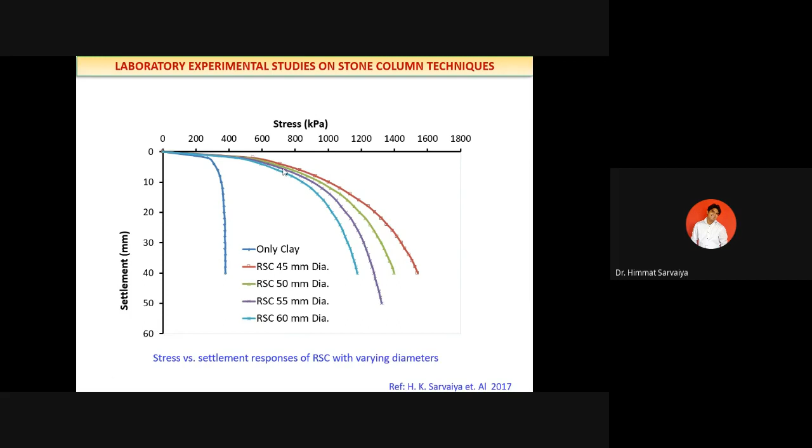Here you can see in my research, this is ordinary stone column with 45, 50, 55 and 60 diameter. You can see the stress versus settlement curve for only clay without treating soil. That means we have not treated the soil with stone column. Only clay is there. You can see it carries only 400 kilopascal load. Okay. So this type of research you can create.

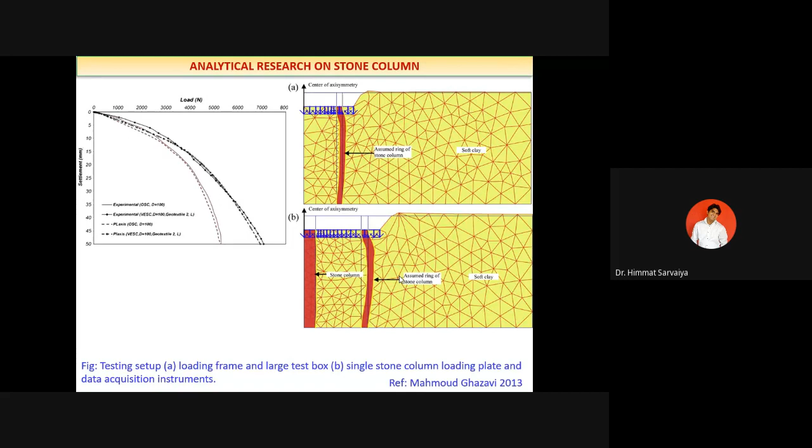Analytical research work is also going on. I will share the presentation with you. In software, you can use Plaxis, Midas General, Midas Geotech; various software is available. You can create or simulate models.

Concluding this session, I can tell you that the stone column technique is versatile and very quick, right? It reduces settlement, mitigates liquefaction, is more economical, has no waiting period, and homogenizes soil with non-cohesive material. No dewatering is required, it reduces overall project cost and reduces time. Compared to other techniques like pile foundation, a stone column will give you ground improvement within 1 week, so your project cost will reduce. These are the references you can go through, which I have mentioned during my presentation.